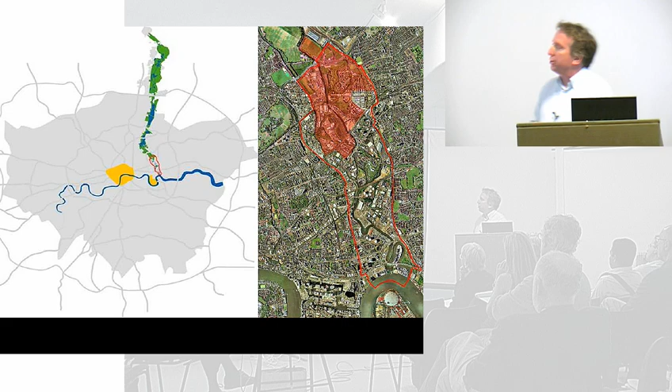The project began from our point of view with the job of identifying which part of the Lee Valley it was possible to consider locating the Games, what had the capacity, what was logical in terms of public transport, what was possible in terms of acquisition of land. In the end the area chosen was immediately to the west of Stratford City - that's the Stratford City development there and the new station, leading up to Hackney Marshes in the north and down to the line. You can more or less see the greenway coming through the site towards the southern side.

The site, the Lee Valley, is obviously an extraordinary location. It's an extraordinary natural landscape on the one hand, with a series of watercourses working their way down from north to south, subdividing, creating a series of islands as they go.

And then, of course, it's a site which has been occupied substantially by man. When you look in more detail, the landscape itself is largely man-made, the consequence of realigning those waterways, dumping fill into the valleys, putting railways through, putting power cables across it, building sewage pumping stations, and building really substantial areas of industrial development. People talk about it as being London's backyard, and essentially that is what it has been.

One of the challenges of the project as a whole is how to let it evolve, because we and lots of other people think it should change, particularly many people who feel their lives have been constrained by this character, but at the same time acknowledging it is an important place to work, and it has to continue to provide that aspect of the city as well.

So you get very extreme contrasts in terms of what you find there at the moment, ranging from pieces of natural landscape which have been allowed to evolve along the length of the waterways, to extraordinary consequences of industrial use. The Fridge Mountain has now disappeared, but it was there when we started the project. And then, historically, some amazing survivals, like the wonderful buildings of Three Mills, and one of our buildings, the sewage pumping station more recently constructed at Abbey Mills.

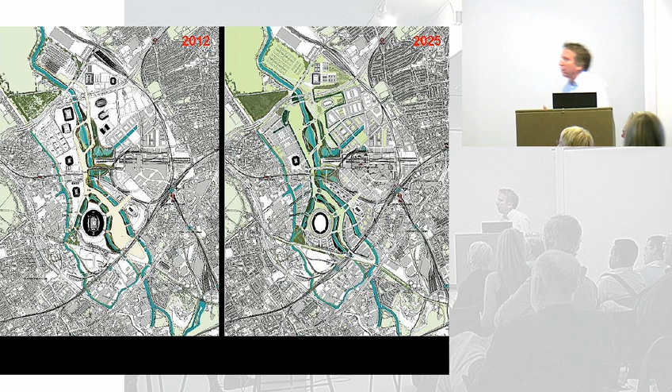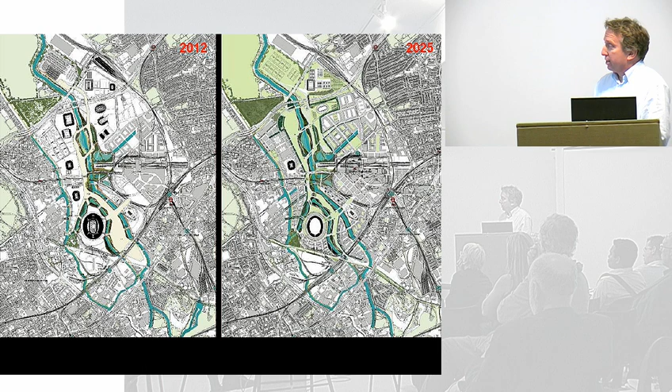Fundamental to the project has been bringing together two aspects simultaneously in the design: on one hand, what was to be built in 2012 for the Olympics—essentially a two-week period followed by the Paralympics, but a huge investment in construction and reshaping the valley—and on the other hand, thinking beyond that to what it would be like in 2025, the legacy left behind, finding the most effective way of shaping the initial investment into something with real utility and value for people living on the site, and even more importantly, how it would benefit the wider community already living in the four London boroughs at each corner of the site.

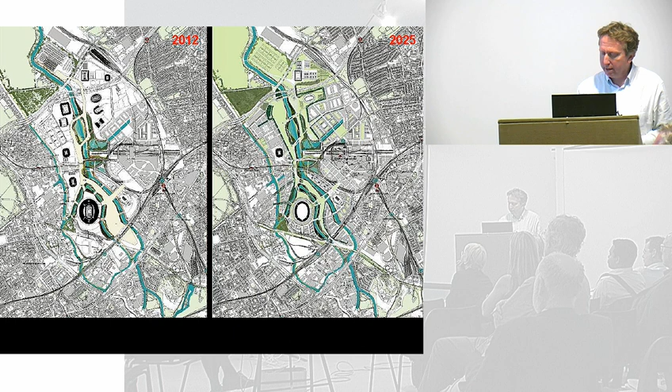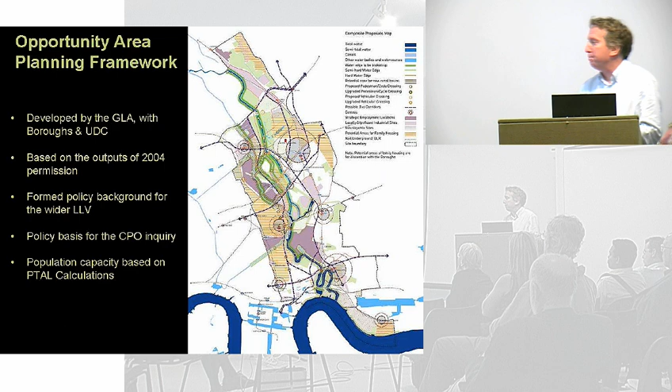Part of the project began by looking at this wider area. The planning framework done for the wider valley looked at significant issues such as employment, the mix of uses going back into the site, and issues of contamination and their consequences for building on different parts of the site.

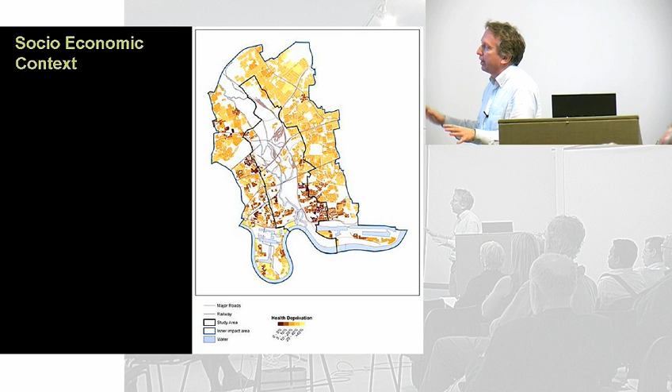We looked at the socio-economic context and quality of life for people living adjacent to the area, and at how the infrastructure worked today—a rather shocking fact being that there was really only one main road crossing the valley. There were three crossing points for major roads serving the nation, but for people who lived and worked there, only one road actually made that crossing.

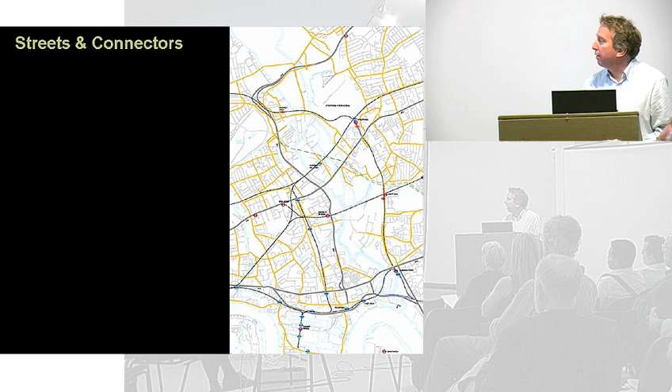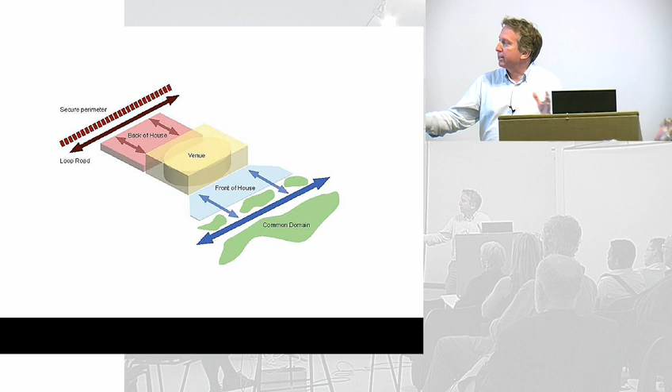Behind the project there has always been the view that we would introduce a series of bridges—sometimes crossing waterways, which are one of the barriers, sometimes crossing roads, which also form big barriers to movement, and also crossing railways, which themselves form major barriers. So the project had this larger-scale planning aspect, and then we had to deal with the Olympics themselves.

This diagram set out a story for how the Olympics wanted to be organized: at the centre of the site there's the common domain, where you move around if you're visiting for the day. From there you move into a front-of-house area where, if you're attending an event at a venue, you're allowed through, and you arrive at the venue.

Beyond the venue is the back of house, where athletes stay and all the servicing is created. Outside that there's a loop road linking up the different venues and back to the Olympic Village, and the whole thing has a secure perimeter. A pattern had to be created to make all this work.

These diagrams talk through that story, beginning with the valley, the waterways running north-south, and the significant east-west crossings formed by larger-scale infrastructure. From north to south we'd introduce a new green link, essential for the Olympics in terms of movement, but perhaps more important as part of a larger strategic network of green space. To make this transition, the park would have to be built over a series of land bridges crossing the big roads and railway systems.

That was the first key element of the park—it would be carried over these infrastructure elements. On either side of the space formed, with this north-south link at its heart, would be the series of venues, with their support areas and a loop road circulating around the perimeter. You can see at the top the buildings currently proposed as part of the Stratford City Masterplan.

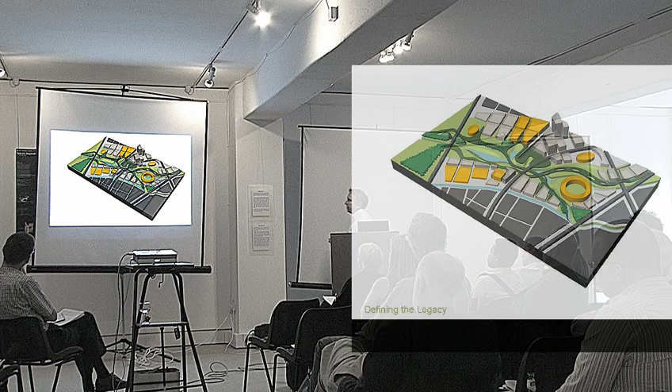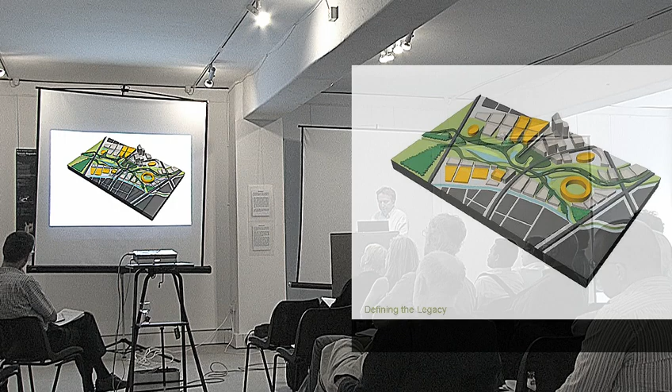Then in legacy, as these venues come away, some—like the main stadium, the aquatics, and the velodrome—will be permanent survivals benefiting the community. Other development would then follow to take the place of some temporary venues and back-of-house areas, beginning to frame the space of the park, a space with a different size, scale, and character from the one created for the games themselves.

In the drawings produced to explain this process, moving from the Olympics into legacy, the planning application showed a series of white spaces. You can see in this planning drawing that some of the venues survive - this is the area of the press centre, one of the largest buildings, which will survive or be modified, and this is the Olympic Village. But then there are areas left white on this drawing where subsequent development will take place.

In order to think about that, a lot of speculation has gone into setting out a pattern for the legacy development which makes sense within the site, but also works hard to draw the neighbouring communities back into the structure. So areas which are currently very separate from the Lee Valley begin to connect into it because of the new road infrastructure generated from the new development.

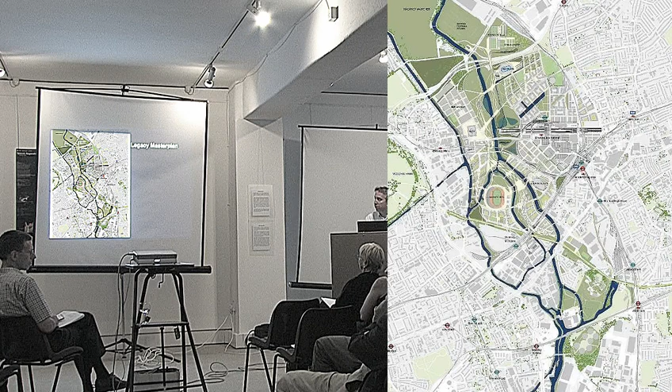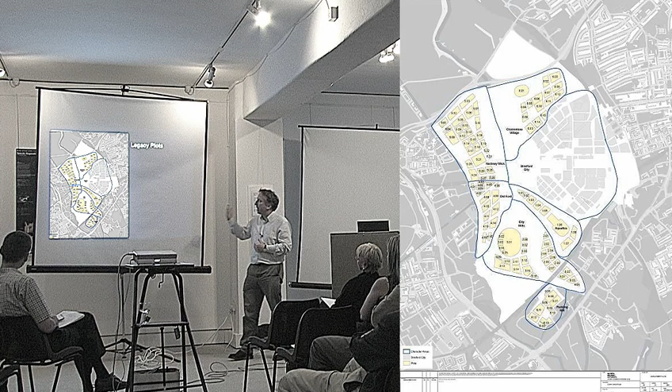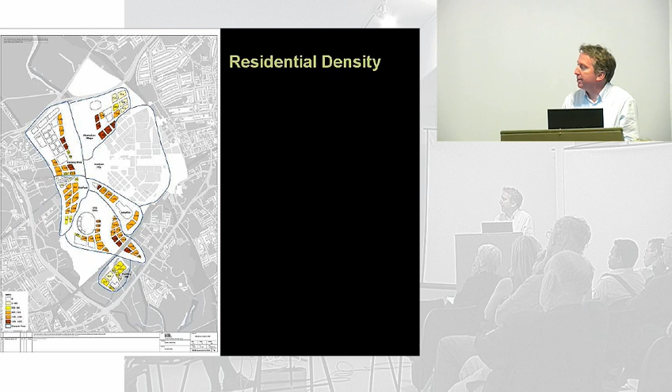The work we've done on this has been critical to making decisions about the park, about the organisation of the Olympics, about the location of infrastructure. We've gone on to look at the scale and nature of development, how plots for development might be located, land use, density, and a first attempt at thinking about how a bus network might work within the area, cycle networks, and the road pattern we're proposing.

Wherever possible, we're anxious to clearly marry the road infrastructure being created for the games with the permanent road infrastructure, although it's a very complicated thing to achieve - a pedestrian network and then a combined movement network.

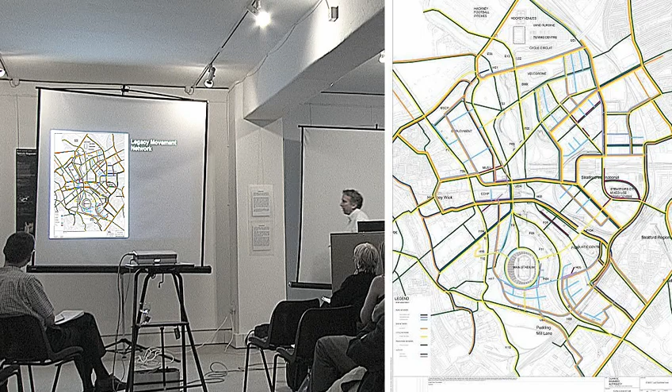But what is also true is that one is very aware that this is a process we're talking about here. We can do drawings like this today, but many of these buildings aren't going to be built for 10 or 20 years. In fact, what I think we're doing here is setting in motion a process which will allow different people to come forward.

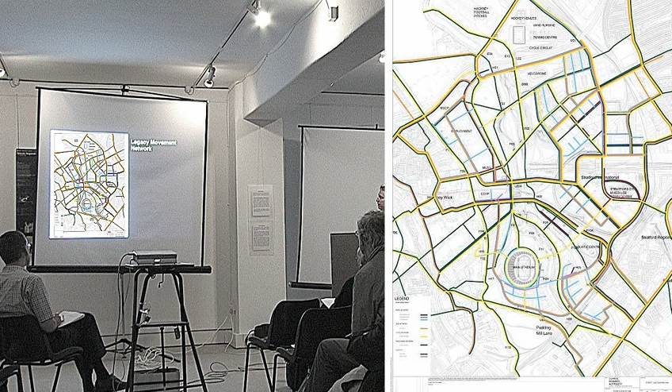I know the plan at the moment is to get different practices to look at different sites within the legacy plan and produce more detailed proposals for each of those prior to going out to attract people to develop buildings within them. So I think it's a process which will have to grow and change, and it would be foolish to be over-specific at this stage.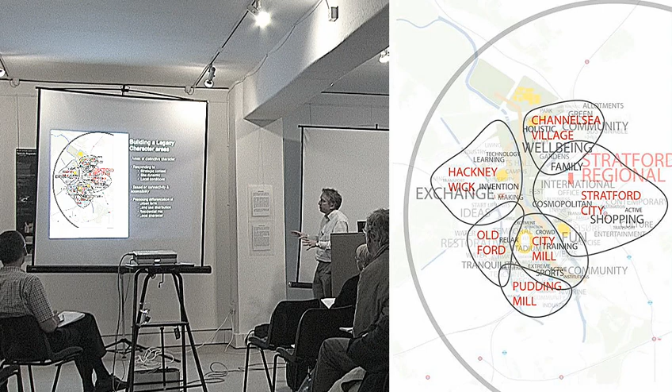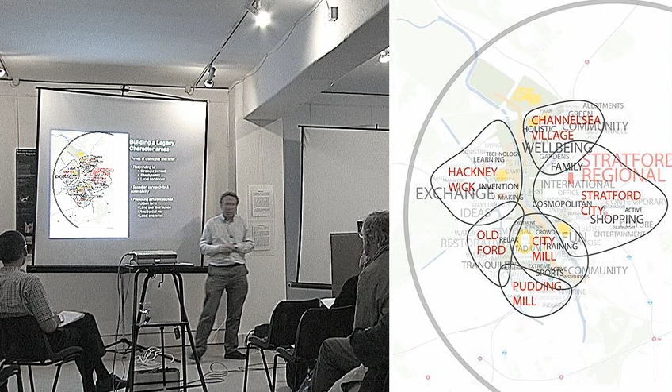Nevertheless, one of the things we've tried to draw out of the project is the idea that around the park there will be a series of discrete neighbourhoods which will go wider than the individual sites we can bring forward, connecting into what seem to be coherent neighbourhoods, or emerging ones, in the case of Stratford City. It would be nice to feel that as each of those different neighbourhoods evolved, they would begin to generate a different character.

And of course, naturally, that is possible because they are likely to have different densities because of their location relative to the transport systems. They're likely to have different uses in response to different views from the local authorities about what should be introduced, and they'll have a different relationship to the park. We'd like to think they would have a very specific relationship to the park as the designs for individual areas are brought forward.

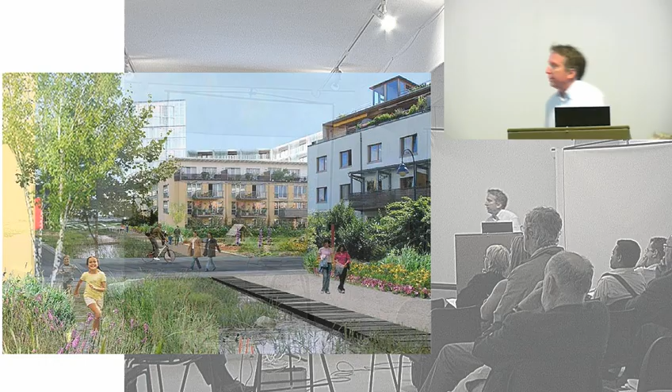This is one of the areas within the centre of the park as it passes between the stadium on the left - not the real design of the stadium, just an illustration - then one of the new housing areas on the right. One of the things that is very interesting to us is getting the balance right between a density of development appropriate to this area, appropriate to the mix of housing we want to provide.

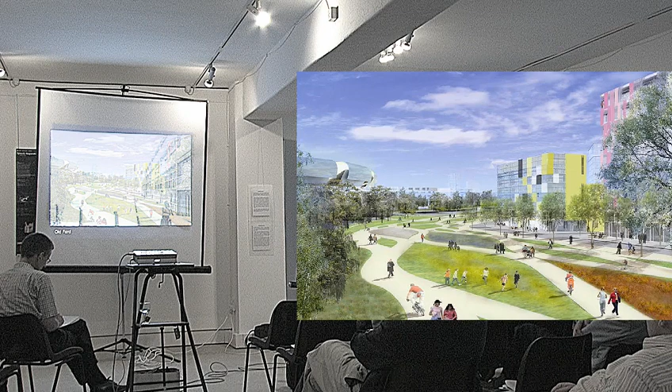Which doesn't always mean it has to be tall buildings with flats, but at the same time recognizing there is going to be a particular kind of quality which comes from the relationship between the buildings surrounding the park and the nature of the space they're able to frame. This is the southwestern corner, where there's a strip of land between some of the waterways.

Central to the development is the park itself. I'm going to keep going for a bit, but John may want to go back to some drawings. This is a kind of diagram of the park, trying to say certain things about its character.

One thing you can see is its curious shape, and I think that's quite significant. It's not a park with a strong geometric definition. Underlying our approach from the beginning has been the idea that it would have a kind of informality, evolving out of the natural landscape we were given.

In terms of scale, it isn't huge either. It's worth saying that when you overlay this drawing onto St James's Park and Green Park together, that's about the scale of the park we're talking about.

As the park moves from north to south, it changes character—the type of place you're in evolves. To the north it's a much more rural setting, and much of the work on the rivers there is to naturalize them, opening up the steep banks to create additional flood capacity, which is important to achieve. Moving south, you're into a denser urban area where spaces are tighter and the character of the landscape is different.

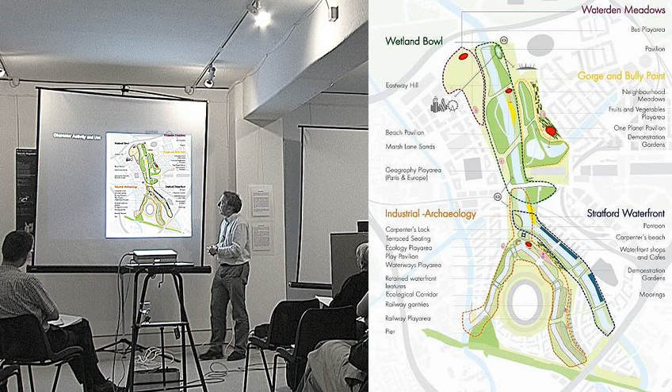When we completed a stage of the project, about two months ago, two drawings were produced to describe the nature of the park and its setting. This is a legacy drawing, so I've turned it around for you—north at the top, north on the right, south on the left.

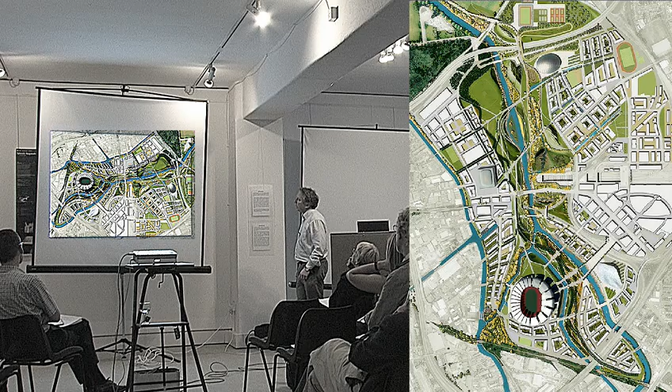One drawing set out the nature of the park, and a second showed it during the Olympics—the shape of the concourse and the disposition of venues on the perimeter. This is the Olympic Village, the new Stratford International Station, the existing Stratford Station, with three main entrances into the park—one from Stratford City across two bridges. This is the aquatics centre designed by Zaha Hadid.

North and south there are two land bridges—one coming in from an area used for temporary coach parking, and a route from the south coming from West Ham along the Greenway and over another land bridge. The third land bridge is over Carpenter's Road and the railway at the centre of the site.

As we showed this drawing and discussed it within our working group, it began to dawn on us that something intriguing was happening: in dealing with the Olympics, we were having to create a kind of platform on which the Olympics could happen. We had to achieve levels commensurate with accessibility across the site, and allow the individual architects and designers of different buildings flexibility in introducing structures.

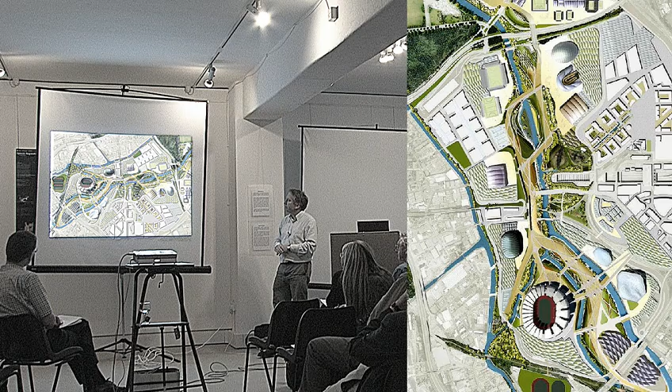So as we worked on the landform, we began to create a level containing all these venues—fairly consistent across the site, even as it lifted up and down crossing the land bridges. Below that level was the surviving landscape of the valley, a kind of natural landscape being revealed, left behind as you planed off this surface to create the platform.

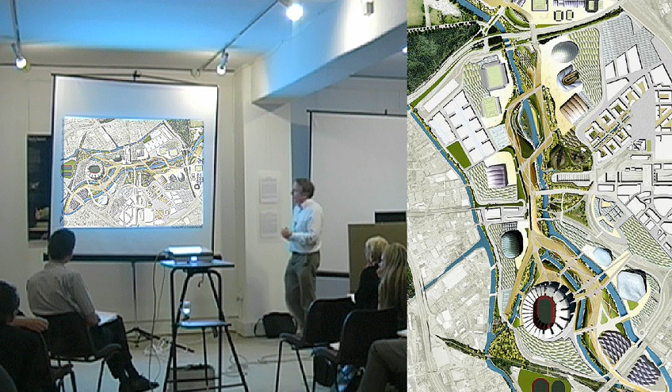That way of thinking about the landscape has now been brought forward into thinking about the park. Whereas before the park was a landscape with a continuous feeling across its length, that idea has evolved.

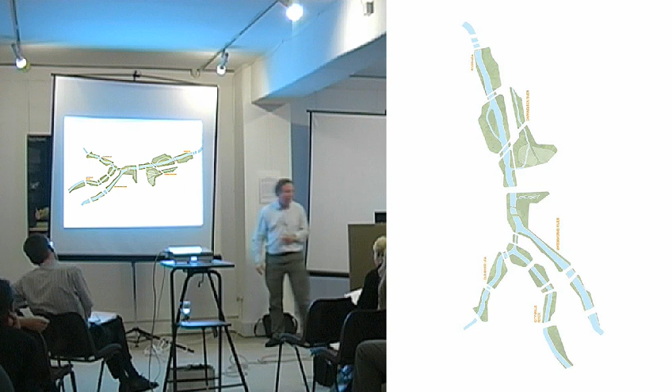What's emerged is an idea about a park which exists on two levels. There's an upper level, created by the games, and a lower level, the level of the rivers and waterways, where the towpaths work their way through, allowing a different type of landscape intervention. The bridges that span from side to side aren't seen as linking two sides of a valley, but as carrying the landscape across the valley as a continuum.

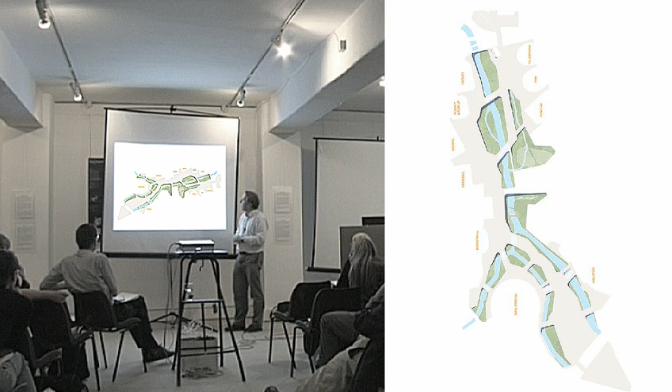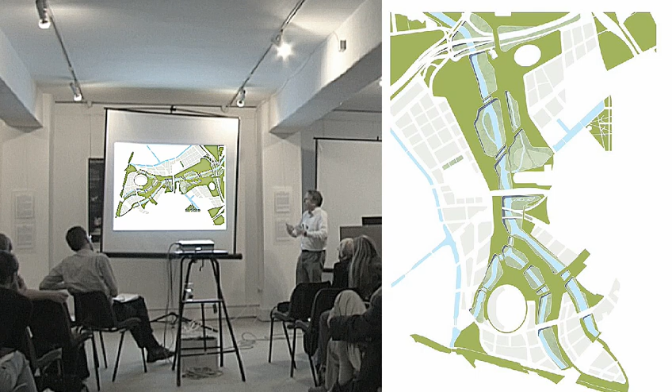In the Olympics, the concourse is created, its edge framed by the individual buildings. In Legacy, that upper area expands again as the temporary buildings come down, creating the wider landscape of the park. What survives from the Olympics is highly particular to the topography of the site and the moves made to create it, and to the interventions like the bridges, whose scale allows the different sides of the valley to interconnect during the games.

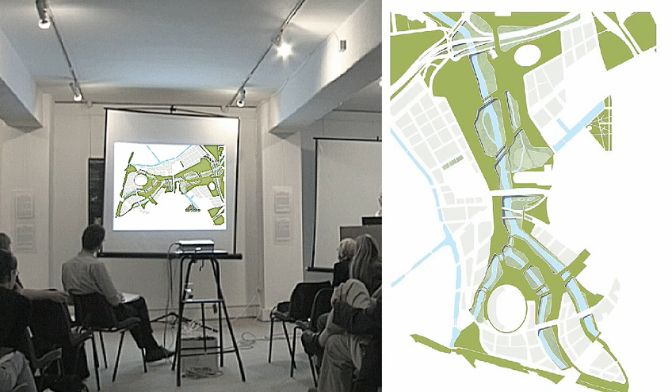In Legacy, the bridges are something we've been looking at more recently, because in nearly every case they have to carry both a permanent bridge left behind and a temporary bridge that substantially expands the scale during the games. What we're exploring now is introducing pairs of permanent bridges wherever possible for these big-scale crossings, with temporary bridges placed between them for the games. This means we can construct all the abutments and lower-level landscape before the games, so the park can be designed in two stages: the lower level created in full when the Olympics opens, and the upper level given the opportunity to evolve over a longer period.

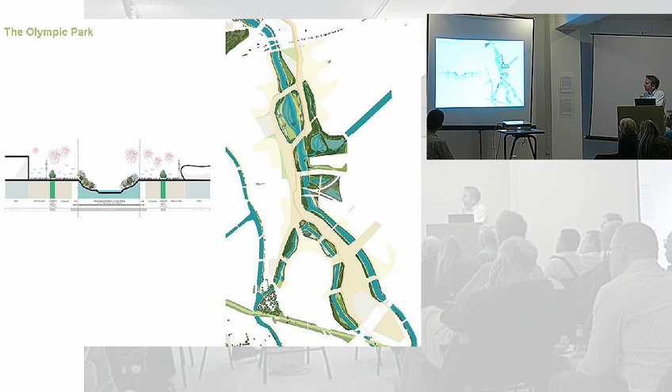I'll just whiz through these. That notion of the cross-section through the landscape is beginning to inform a lot of the thinking about the design of the park, and how the particular form of the landscape will evolve.

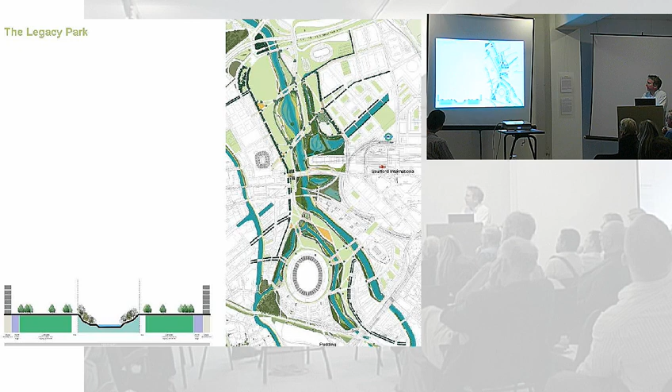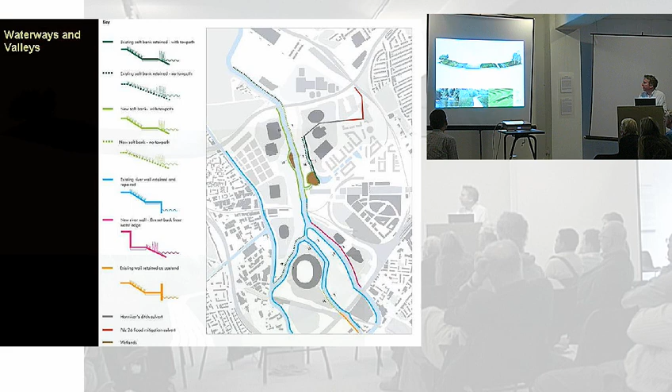Clearly one of the biggest questions is how the waterways themselves are dealt with within this landscape. Sometimes they're being naturalized, opening up a greener landscape than exists at the moment. Sometimes we're working with the existing river walls, repairing and restoring them, so there will be areas with a greater sense of the site's archaeology. Sometimes new walls are being created, so there are different responses in different parts of the site, and different characters come through in how these areas are treated.

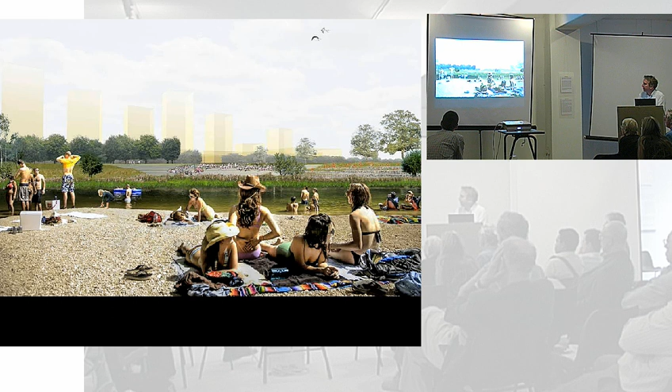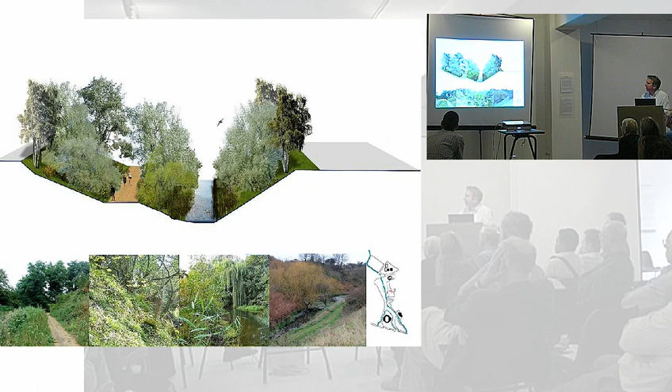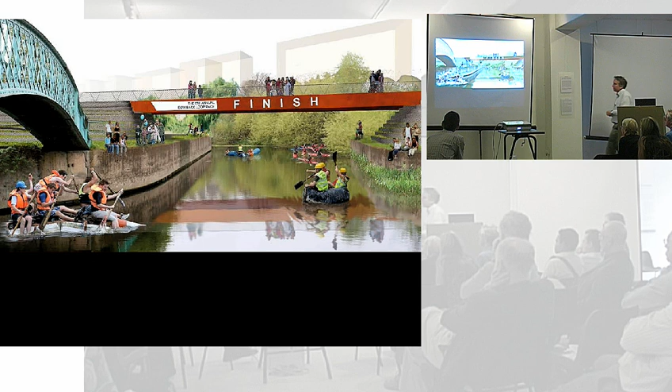This is a beach in the wetlands area, in the northern part of the site, where the river banks are opened up. This is Henniker's Ditch, where the landscape is very steep. Moving south into areas where the waterways are more contained, the towpaths are closer together, but there are still green edges to the waterways. This is one of the new bridges, in fact one now subject to an architectural competition, and here's one of the existing bridges being retained. Moving further south, the character of the waterways and their use might begin to evolve again, getting nearer to the aquatic centre.

So the project is evolving. Some of these drawings were done very recently, and I'm sure it will evolve again—a lot of what I've talked about will keep changing. But as every month goes by there's less opportunity to change, because on site some of this work is beginning to be built, some of the bigger engineering work is just starting, and the design process is gradually becoming more fixed.